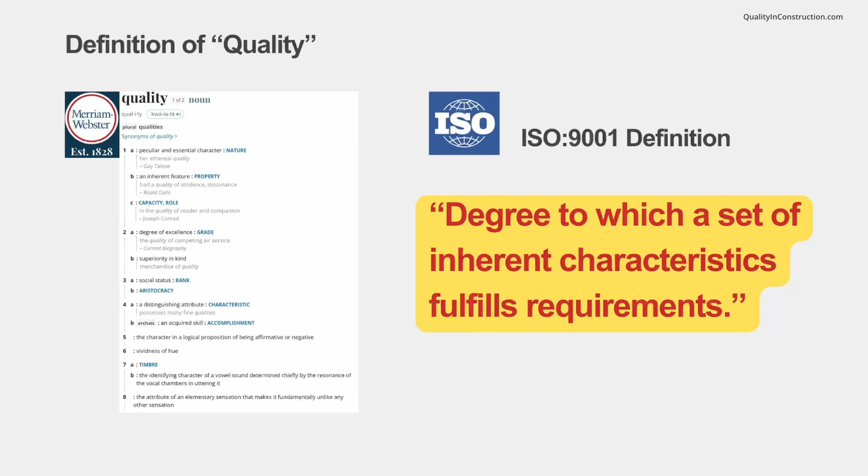The Merriam-Webster dictionary has 8 different definitions for quality, but for the purposes of this presentation, we will stick to definition number 2, the degree of excellence. However, the International Standards Organization, ISO, through its ISO 9001 standard, has provided an even better definition in the last decades. Quality is the degree to which a set of inherent characteristics fulfills some requirements.

So, at the end of the day, the important question should be, what are these requirements? And more importantly, what are the requirements in construction? We really need to understand what the requirements are in the construction industry, where do they come from, and how we will make sure we meet them. The requirements in the construction industry are set mainly by the clients. They will specify what they need to be constructed, when and how.

However, our clients are not the only source of requirements in the construction industry. The main contract is obviously the key document that specifies what the requirements coming from the client are, but if we dig more into the details, we have even more sources. Ultimately, the design drawings are a key source of requirements as they basically specify what needs to be built and how.

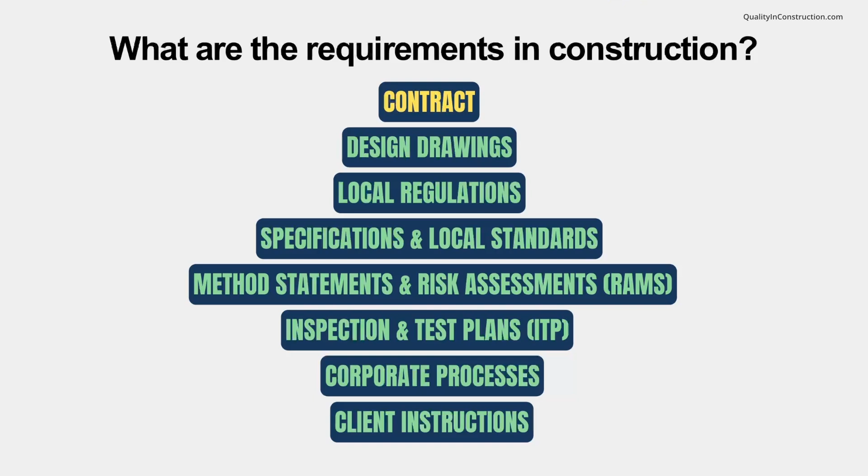But there are also other documents that are equally important, such as regulations and standards, specifications, the method statements and the risk assessments, the inspection and test plans, or ITPs, any internal business corporate processes that may exist for a specific company, or even specific client instructions that may sit on top of the main contract. These may have been instructed through RFIs or other documentation.

There are a lot of misconceptions in regards to what quality management in construction is, so it's good to clear this out first. Quality management in construction is not just the paperwork and the handover documentation. Yes, record keeping is one of the key processes that must exist in a construction project of any scale to be used as evidence of what has been built, complying with the requirements, but it's not only that.

The quality processes are also only part of the quality management system, and setting them up in the early days of a construction project is extremely important. But what is also important is the way we implement and refine those processes as we progress. Finally, quality should never be a problem of just one person in a construction project, but it should be embedded into the culture of an organization and the people working on a construction project.

When there is a company and a project that has a dedicated person looking after its quality management system, it goes without saying that there is more effort and dedication from the senior leadership too. Overall, quality is teamwork, and it is not an isolated task that projects must do on top of other things. Now, let's see some shocking statistics about quality management in the construction industry.

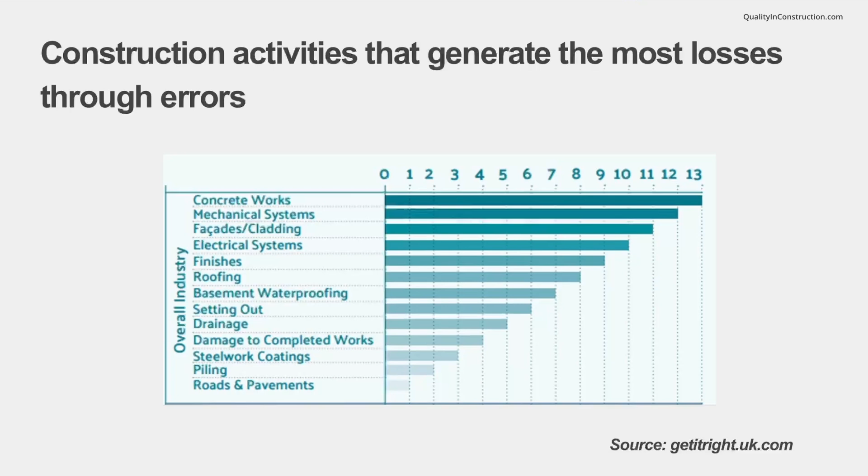The study also showed an analysis in regards to the activities that generate the most losses through those errors, and it is no surprise that concrete works are on top, as this is usually the most costly and time-consuming activity in a construction project. Errors in mechanical and electrical installations are also there on top, along with cladding, finishes, roofing and waterproofing.

Moreover, the most common root causes of these errors were analysed and ranked. Inadequate planning, late design changes, poor communication, poor quality culture, and, in my opinion the worst of all, excessive commercial, money and time pressures sit on top of this list. For those working in the construction industry, there is no surprise to this list, but this exceptional study put some figures into what everyone already knows.

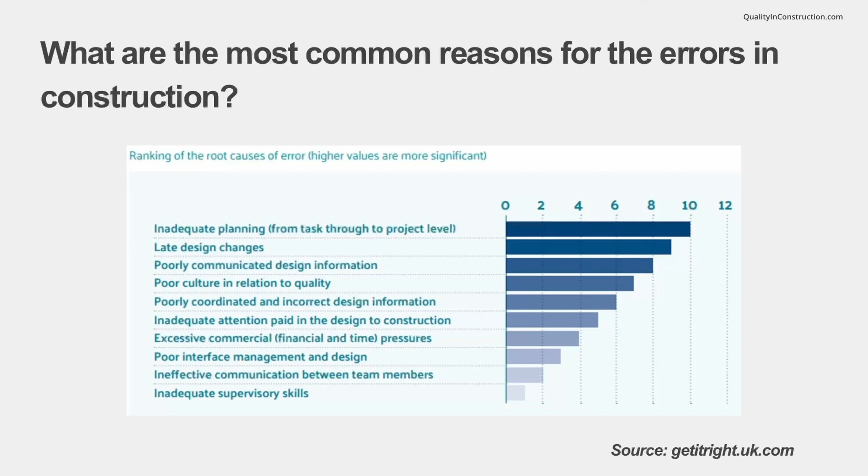Now, let's see the basics of quality management, as this is by far the best tool to reduce those errors in a construction project. Quality management is basically the system and the resources we put in place in order to achieve a required result. In construction, the required result is to basically have a happy client and build exactly what they wanted on time and in budget. Construction industry is one of the very few industries where the client has direct input for the product, which is actually a great thing because the requirements are drawn from day one.

So, the quality management system is the set of interrelated processes that helps an organization, a company, or even a construction project to achieve its goals. Everything that happens in a project or a company is a process that must be documented, reviewed, and refined on a regular basis.

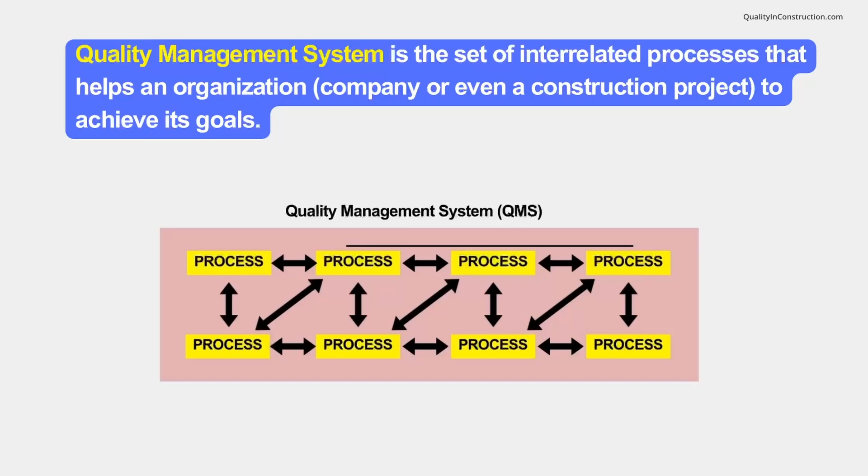The key concept of quality management is the PDCA cycle, or the Plan, Do, Check, Act cycle. In fact, everything we do in life is governed by the PDCA cycle in a way or another. We plan to do something, we actually do it, we then check if it's okay, and at the end, we change, correct, or fix things that don't work or that don't satisfy us. This is a very simple but extremely important concept for any quality management system.

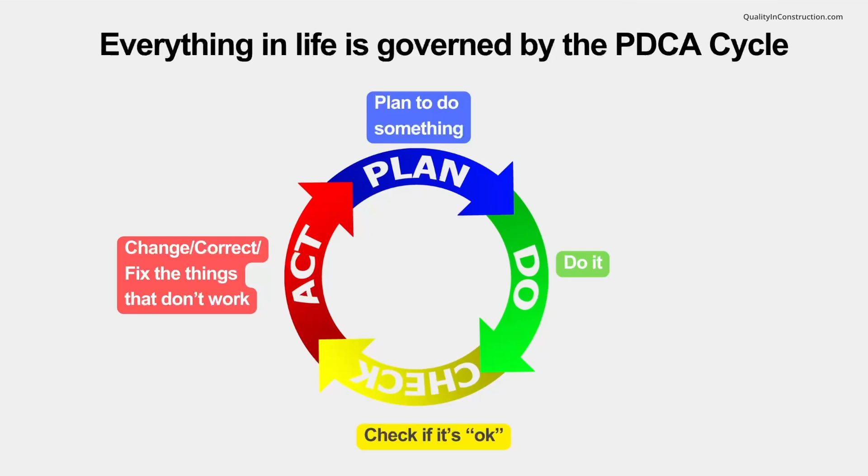Let's take a real-life example of a wedding. First, the wedding is planned. Then, the wedding is carried out. You then check if everything goes as it should, and at the end, you take some actions to correct things, or maybe not. But the important thing here is that this is a continuous cycle that never stops.

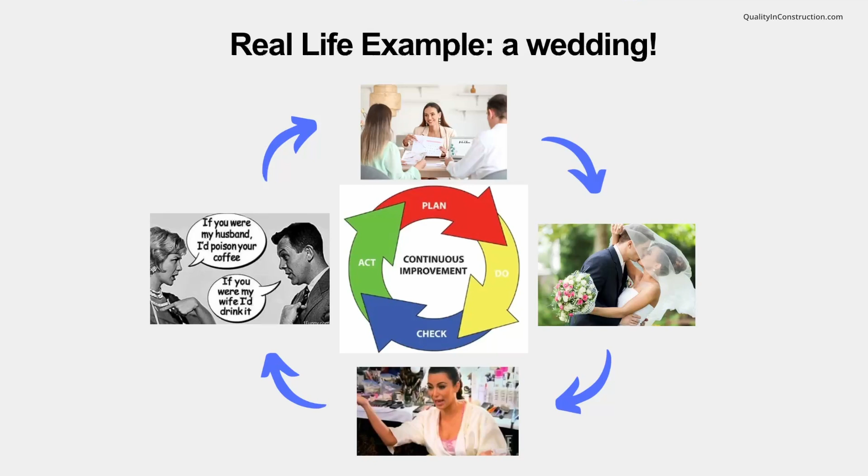So, how are all these things actually implemented in a construction project? Everything we do in construction is governed by the PDCA cycle, but not that many people realize it. All the schedule planning, the design, the contracts, our internal processes, the risk assessments, the method statements, and even the inspection and test plans are all part of the plan step of the cycle. We literally plan how to build the project by satisfying all requirements. This is the quality assurance part.

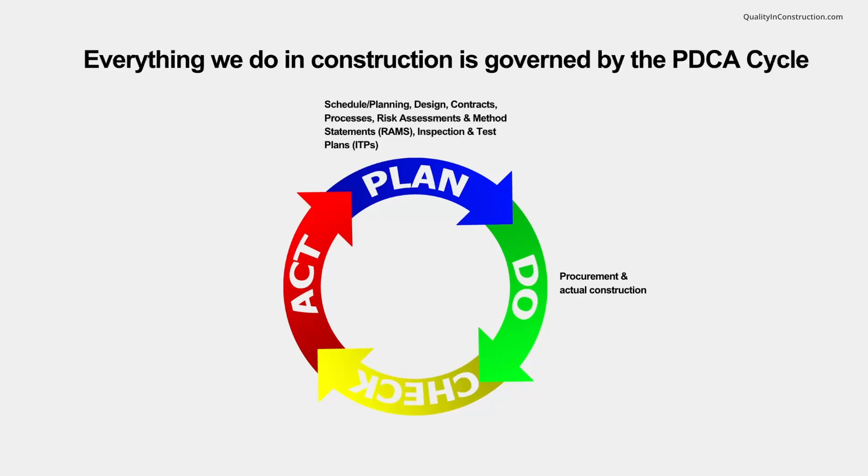We then procure and actually build it. But we need to keep on checking if it's been built right. So we carry out inspections on or off-site, we carry out audits, surveillances, we do the testing and commissioning at the end to make sure everything works as it should. If not, we then need to take actions to repair things, to fix errors, or even change our initial designs and materials choices. The check and act steps are literally the quality control part.

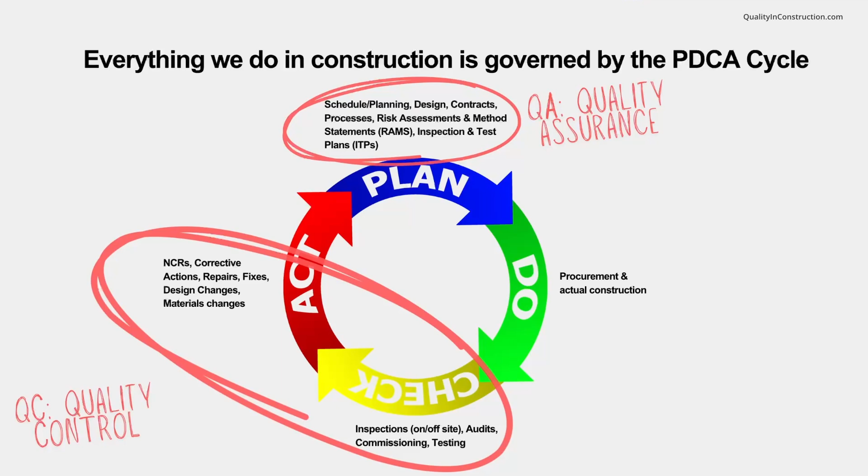So, quality assurance is everything we put in place before the actual construction of a project to make sure it will meet the requirements. And quality control is everything we do during or after construction to make sure that the project has met the requirements and it will keep on meeting them consistently.

So, in practical terms, quality management in construction is implemented in the following steps. We set up the quality management system so that it meets contractual requirements, quality processes, policies, and procedures. Then, we must train the people who will be working on the project on these processes and policies that they must follow on or off-site. This step is extremely important as you may end up with perfect processes and documentation that nobody is actually following because they don't even know they exist. You then check that the agreed processes are followed with random inspections, audits, and even documentation and records reviews.

In case a non-conformance appears, you should use tools such as the non-conformance reports or NCRs to record that occurrence and make sure it won't happen again by eliminating the root cause and basically apply corrective actions. Finally, repeat from step 2 and also analyze any trends and even long-term issues that may occur in a construction site.

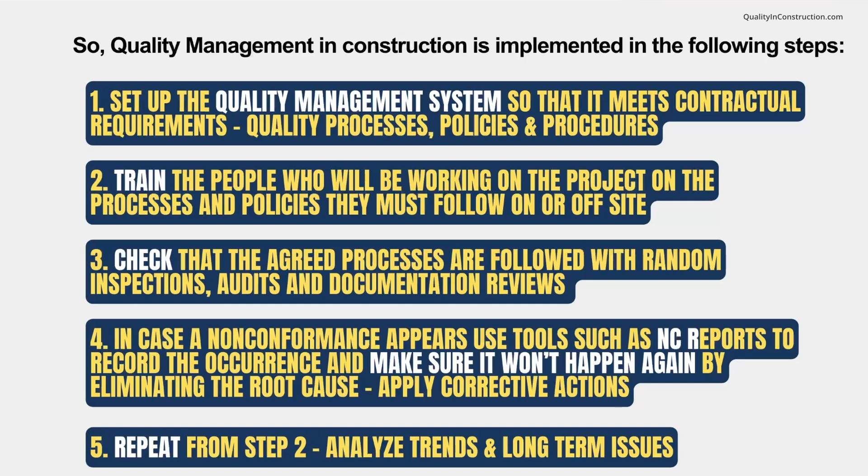So, overall, how does quality management help a construction project and a company? There is a list of things that are put in risk when there are errors in construction. First of all, repairing things cost money, and in many cases they can even derail a project's budget completely by eliminating any profit margins. It goes without saying that if things are not right, we also risk health and safety on site, while at the same time repeating the same mistakes all over again can bring the workforce to poor

morale. Defects and errors can also lead to long legal battles between the stakeholders of a project. They can even lead to fines, massive delays, and ultimately very bad reputation for companies. Reputation in construction is possibly the single most important factor to a company's success in the industry.

So, to put it simply, quality management in construction is a tidy way of formalizing how we offer our services as a company. It is the way we manage our resources. It is the way we sort out any issues. It is the way we win new projects, especially if we even have ISO 9001 certification. It is how we plan and design our projects. It is how we manage the risk.

It is how we select and manage our suppliers and subcontractors. It is the way we hand over our projects to our clients. It is the way we communicate with our clients. It is how we record and report what is happening on our sites. It is the way of avoiding historical mistakes and learn from the past. And it is the way we improve as a business.

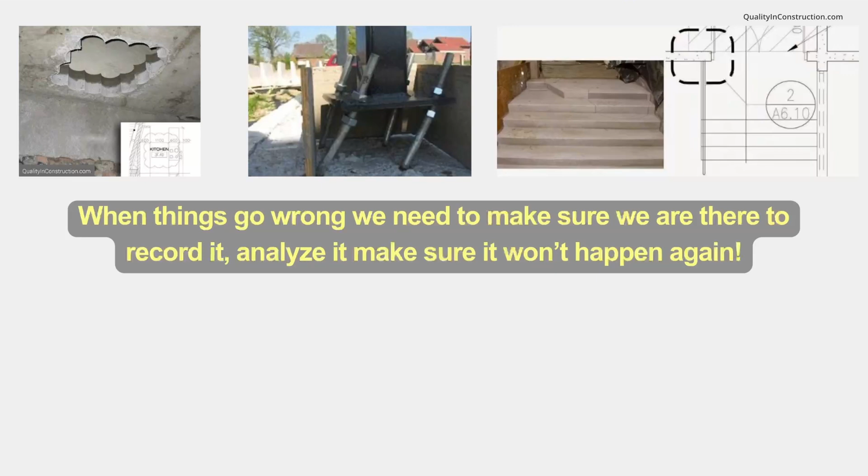The sad reality, though, is that things have gone wrong in the past, and when they had gone terribly wrong, they even cost hundreds of human lives. So the important thing is to understand that whenever things go wrong, no matter the scale of the risk, we need to record the issue, we need to analyze it, and we need to make sure it won't happen again. That is continuous improvement.

And the tool for doing such a thing is the non-conformity report or non-conformance report, which is basically a very simple form that describes what happened, what is the deviation or the non-conformity, what is the root cause of this non-conformity, how we may fix the problem and put it right, and, after all, what measures have we put in place in order to make sure it won't happen again.

NCRs are actually a good thing, and they help us analyze what went wrong so that we won't repeat it again. However, repeating the same NCRs all over again shows that either there is no real corrective action applied, or that the real root cause was never identified properly.

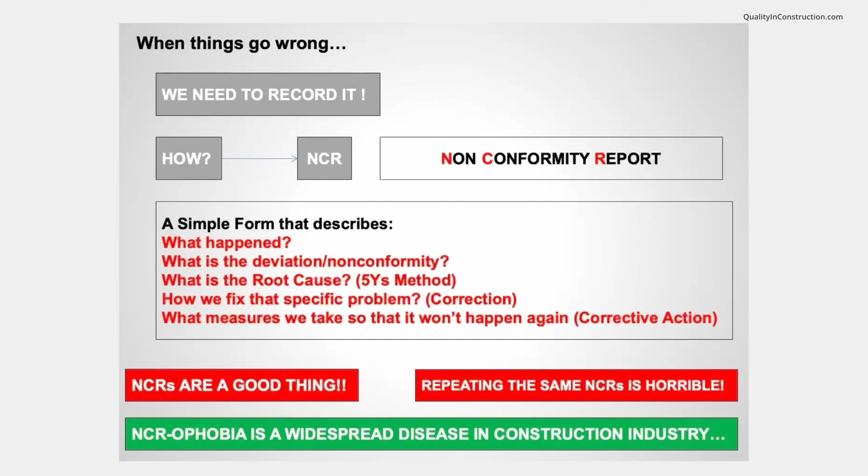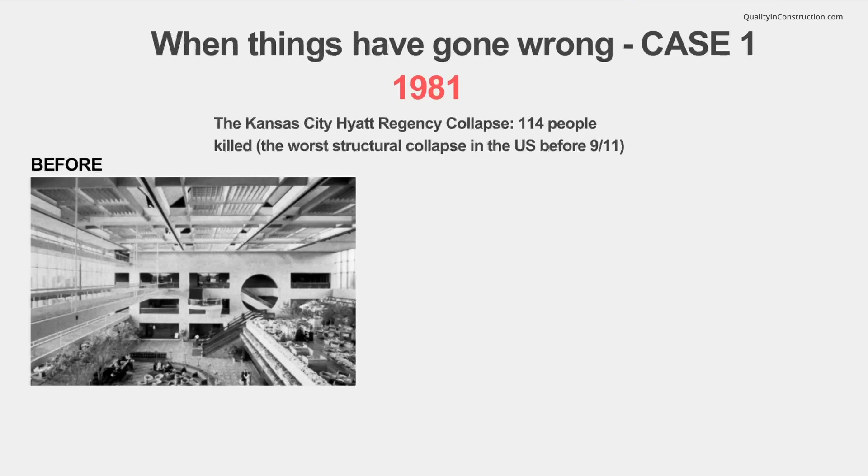One of the most remarkable cases of construction errors that literally cost hundreds of lives happened in 1981 in Kansas City with the infamous Hyatt Regency Hotel walkway collapse. This was literally the worst structural collapse in the US before 9/11, and the main root cause of this collapse, that killed 114 people, was basically the drawings that had been prepared by the designer and were only preliminary, but they were actually interpreted by the contractor as the final for construction drawings.

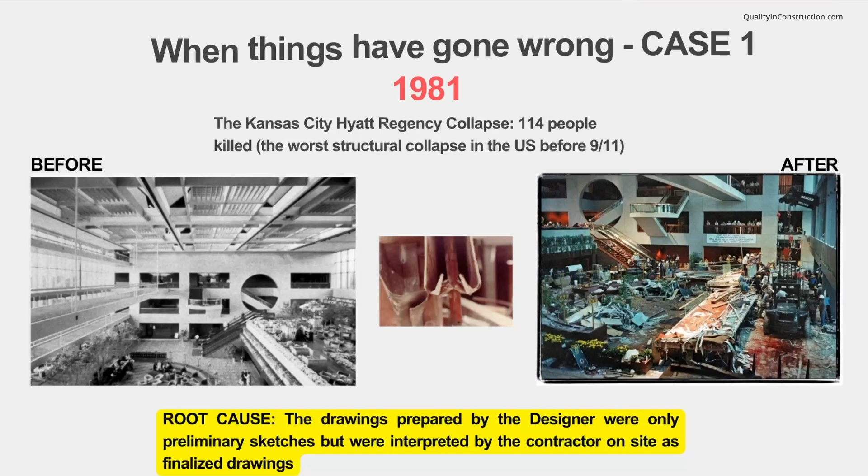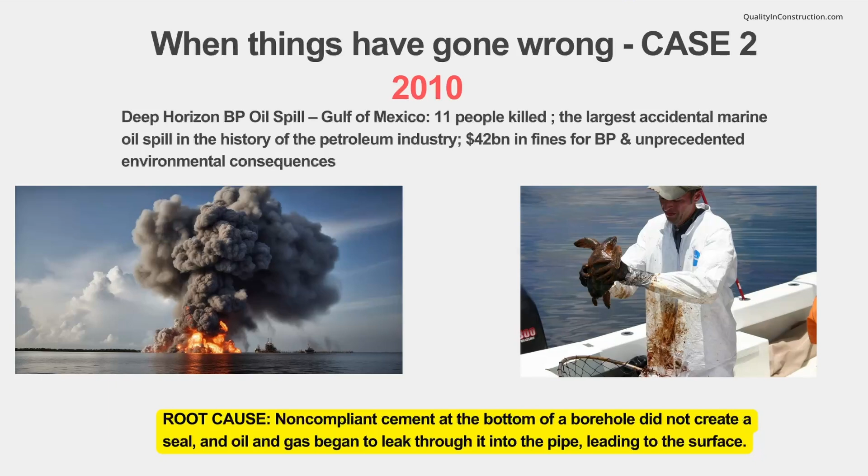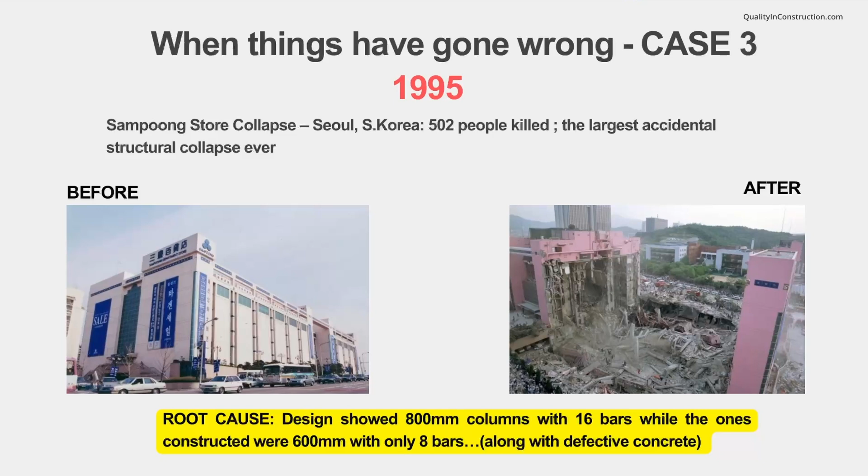So, let's learn a lesson and make sure this won't happen again.